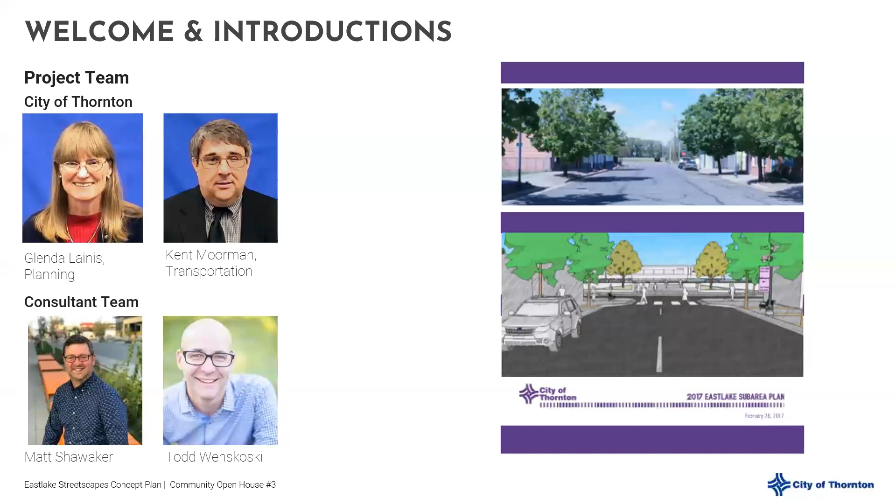The project we are presenting today is a next step action recommended in the 2017 Eastlake Sub-Area Plan. It's led by the City of Thornton team, including Glenda Lainis from Planning and Kent Moorman from Transportation. The consultant team is led by Livable City Studio, including Todd Wenskoski and myself, Matt Shawaker.

The agenda for today is clear: a quick welcome, a quick overview of the project schedule and where we're at, a review of the preferred alternatives, as well as wayfinding and signage, and then questions and discussions and next steps.

For this meeting, the questions and discussions that were held at the original live meeting on July 25th are summarized and available on the City of Thornton website.

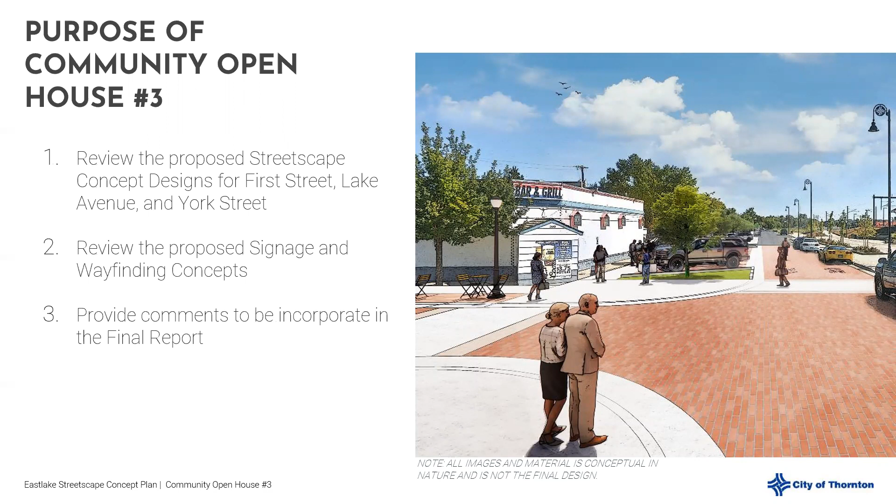The purpose of this meeting is to review the proposed streetscape concept design for First Street, Lake Avenue, and York Street, as well as the signage and wayfinding concepts. Your comments that you can make through the website will be incorporated into the final report and influence the final conceptual designs, phasing, and implementation.

A brief overview of the project for those who have not seen this previously. The goal of this project is to develop streetscape conceptual plans for Lake Avenue, the east side of First Street, and York Street from 124th Avenue to Birch Street.

These plans will be conceptual level, and costs will be prepared to inform future implementation projects. I want to be clear, no funding has been set aside for the implementation of these projects as of yet.

Conceptual level plan components will include cross sections describing ADA compliant sidewalks, traffic lanes, and bike lanes, as well as parking configuration. In addition, they include landscaping and identification of opportunities for placemaking, amenities, and public art. Lastly, the next step will be implementation tools and strategies to construct or phase the construction of the streets.

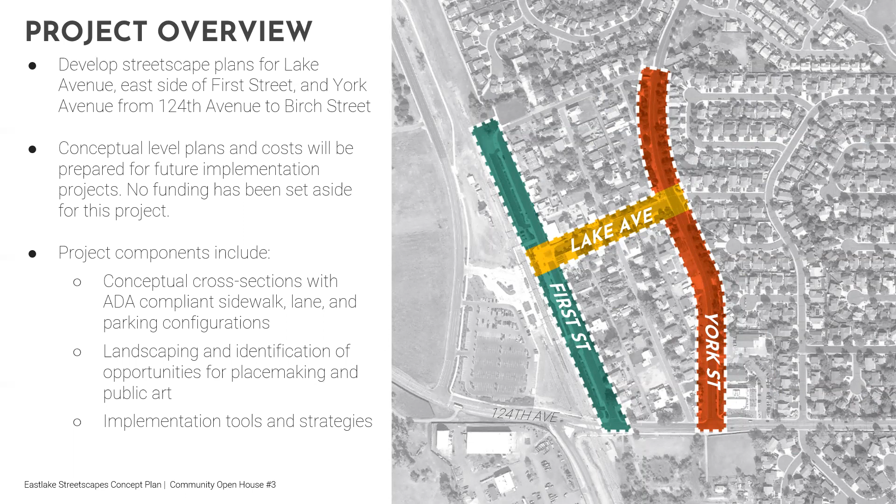Through that process and the existing conditions analysis, we identified the potential role of each street in the neighborhood. First Street, in green, really becomes the front door to the neighborhood, primarily from 124th Avenue, as well as the light rail station.

Its functions are business access and function to accommodate the businesses along the east side, comfortable pedestrian and bike connections to Lake Avenue, trails to the north and south, and of course the N-line station, and then identity and gateway into the Eastlake neighborhood, given its first impressions and front door.

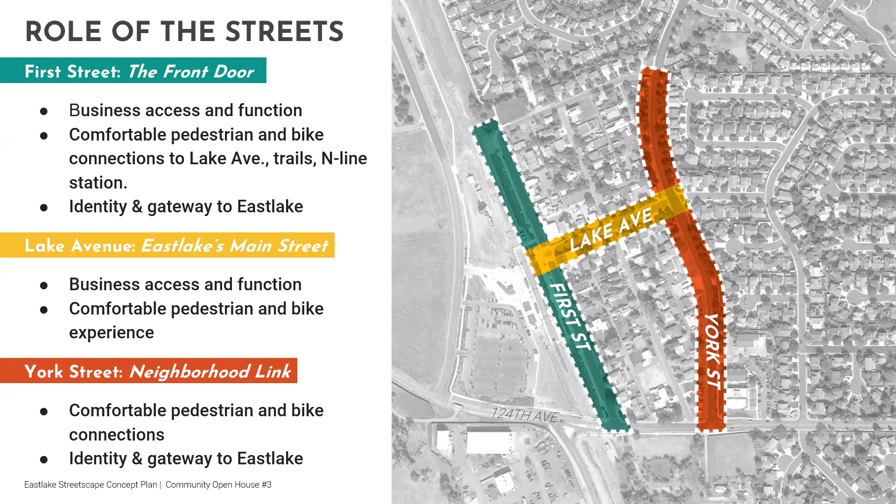We thought a quick review of the existing conditions and opportunities would be valuable before reviewing the alternatives. For First and York Street, the primary conclusion from the existing conditions analysis is that the roadways are too wide. This encourages speeding and limits space and comfortable use for pedestrians or bike users.

The key opportunity for these two streets is to narrow the lanes, which will slow traffic and then create space for pedestrian and bikes, as well as other amenities, including landscape.

On Lake Avenue, the street isn't overly wide. There is limited opportunity to narrow it, but the key opportunities there are to accommodate pedestrians and bikes and resolve some of the grading challenges that create access challenges.

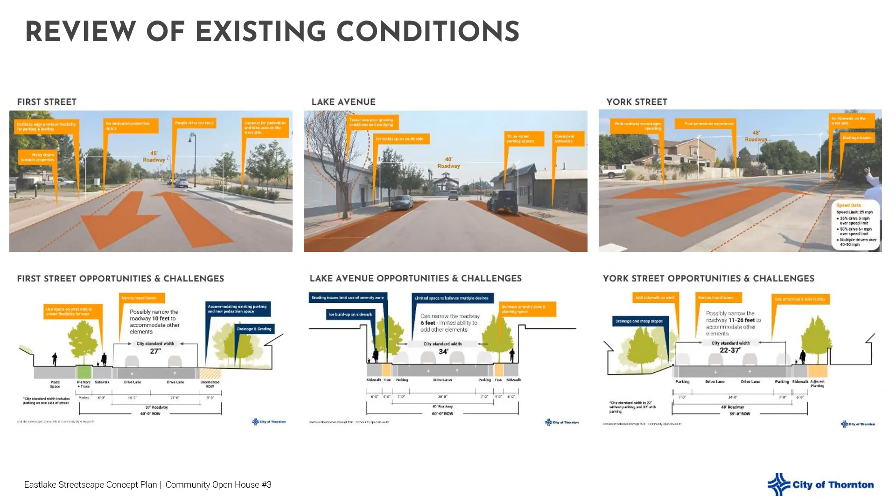Previously, in community meeting number 2, we reviewed two alternatives for each street and then gathered community feedback through discussion in the meeting, live surveys, and subsequent online surveys. Our goal for today in this next part is to review these alternatives, the survey results, and then the development of the preferred alternative for each street.

So we'll start with First Street.

Two alternatives were presented for First Street. Alternative 1 was a complete street, meaning it includes safe, comfortable elements for each type of user: pedestrians, bicyclists, vehicles, and of course parking, as well as amenity spaces for them.

In alternative 1, on the left in light blue are painted bike lanes, in the center two 10-foot traffic lanes, and in darker blue, ADA accessible sidewalks, with green representing landscape and space for amenities and street trees. On the right side, some parallel parking is provided on the east side.

Alternative 2, called Flexible East Side, emphasizes accommodating the function and access for existing businesses on the east side of First Street. The roadway space is shifted as far west as possible and made as narrow as possible to create additional space on the east side for a new sidewalk, green amenity zones, street tree areas, and parallel or angled parking similar to the existing layout of the street.

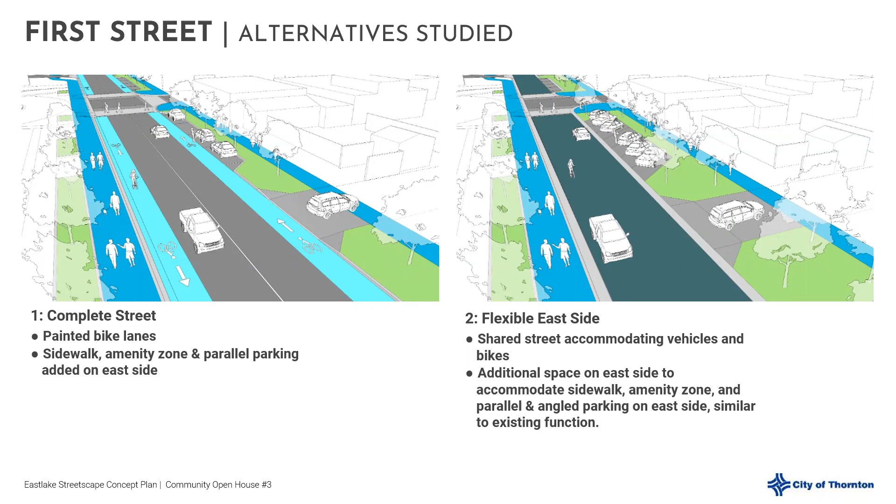The second question: of the two alternatives presented for First Street, do you have a preference? The survey showed a preference for alternative 2.

Based on that, and additional review with the city of Thornton and other stakeholders, alternative 2 was selected as the preferred alternative. Key features include the travel lanes shifted to the west curb to accommodate the organization of parking along the east side, expanded pedestrian and amenity green spaces on the east side, and the shared street shown in blue, reducing the width of the lanes to create space on the east side.

This preferred alternative proposes a shared street — a differently textured and surfaced street than typical, promoting slower travel, narrow, and shared between all users, meaning bikes and cars. The key is keeping the speed slow, which we believe we can do.

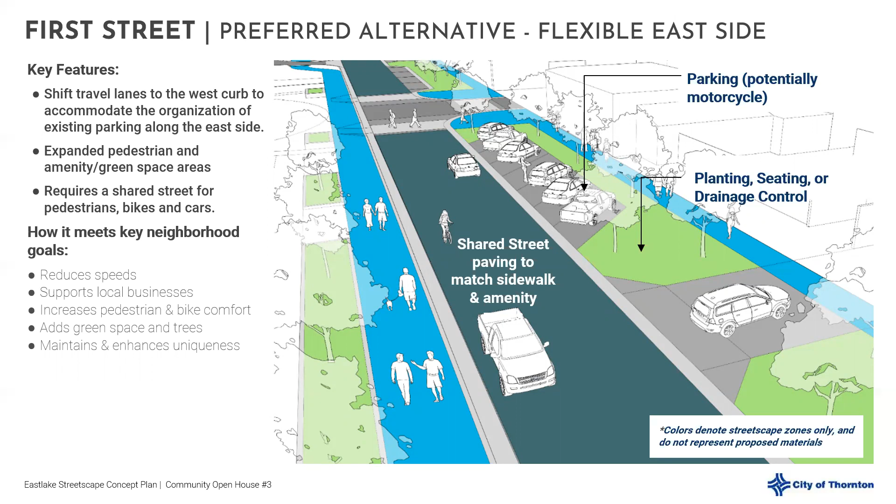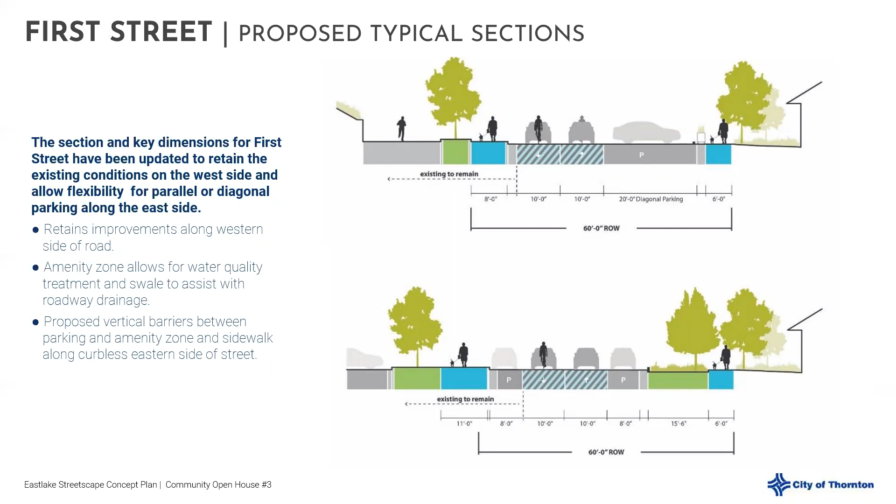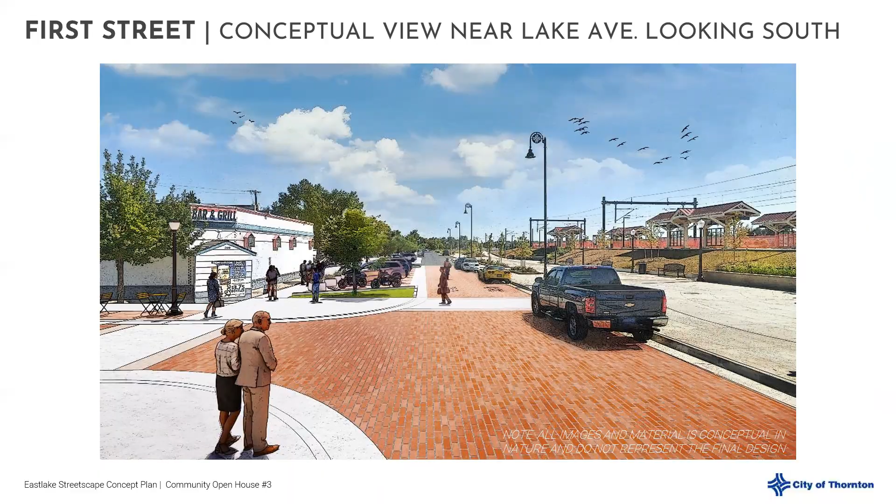Moving on to Lake Avenue now. Again, two alternatives were studied for Lake Avenue. The key existing condition and challenge on Lake Avenue is grading.

For those who have been out there or seen previous presentations, we know there are multiple areas along Lake Avenue between First Street all the way down to York Street where the front doors of buildings are up to 1.5 or even 2 feet higher than the roadway itself, which creates access challenges that need to be resolved in a new concept.

So how we resolve that concept and also balance the competing needs for parking, businesses, pedestrian spaces, amenity spaces, as well as bike circulation become the challenge on the street.

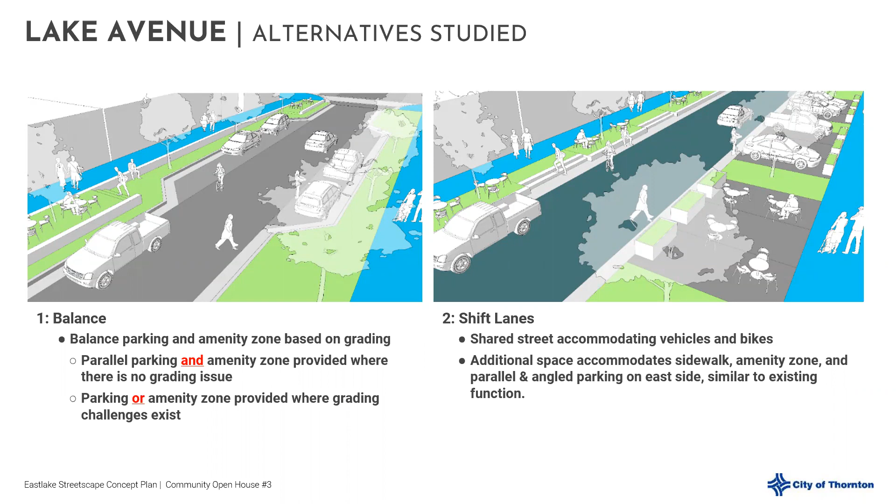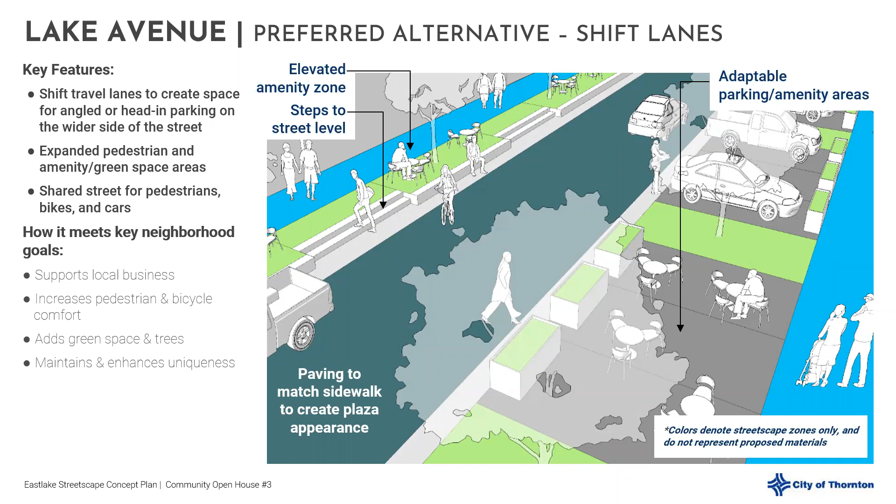The other key feature here is a narrow shared street for pedestrians, bikes, and cars. We believe this alternative meets those key neighborhood goals, supports local businesses, increases pedestrian and bike comfort, and adds green spaces and trees, really creating a unique space and street within the neighborhood.

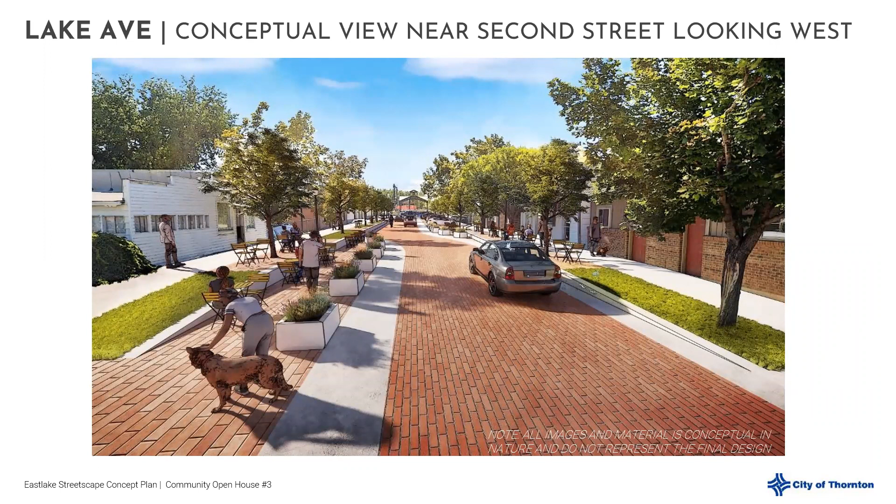You can see a key feature about in the middle of the image where the roadway curve slightly shifts to the left. That is a key design feature that allows us to locate the head-in parking in the distance where the grading best accommodates and where the adjacent uses best require it, but also will serve to additionally slow down vehicles because they have to navigate that slight curve.

And last but not least, York Street. Again, 2 alternatives were studied for York Street. The first one we called bike lanes, and before I get into it, I'll identify several common features to both, and then we can discuss the 2 things that are different in each alternative.

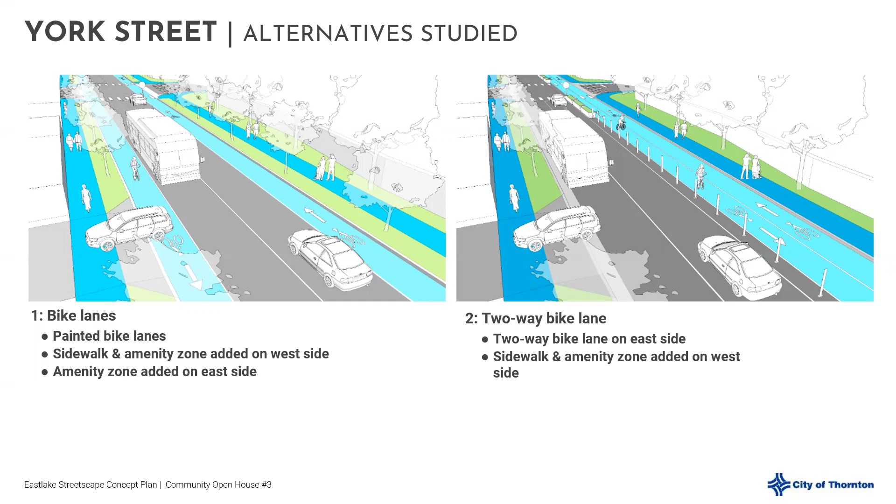So based on this feedback and discussion internally with the city and stakeholders, alternative 2 was selected as the preferred alternative. This is for a couple key reasons. One, alternative 2, by locating the two-way bike lane on the east side of the roadway, we reduced the driveway conflicts and increases the comfort and safety for the bikers.

On the east side, there are, I believe, 3 intersections between 124th Avenue and 128th Avenue. On the west side, there are those same 3 intersections, as well as several driveways. So locating the bike lanes on the east greatly reduces those conflicts and increases the comfort. It also allows that bike lane to seamlessly connect to multi-use trails to the north that lead to Eastlake Lake Park and other open spaces in the community.

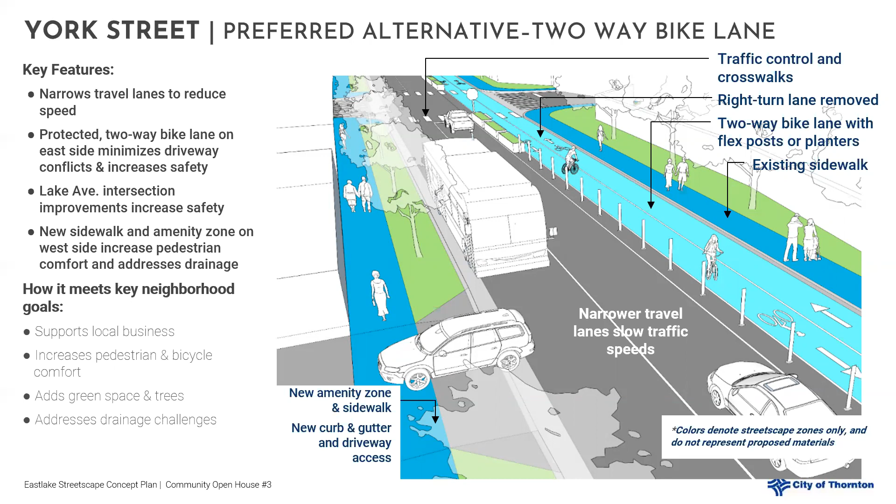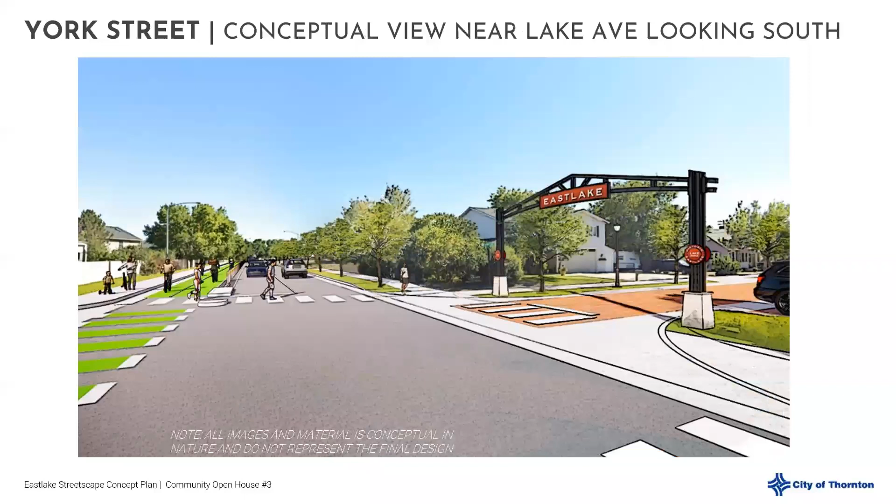Again, you can see in the green on the left side, the two-way bike lane with the posts and the curb protecting it. 2 travel lanes on the right side there, and then to the far right of the street, a new sidewalk and new green spaces with trees. You also see here at the intersection with Lake Avenue, a new gateway feature proposed at the intersection with Lake as you enter Lake Avenue, moving into the main street of Eastlake.

So the 2017 sub-area plan included a parking study that estimated the long-term need for parking in the neighborhood at 400 parking spaces. The existing streets, as you can see here tallied on the left, 1st Street, Lake Avenue, York Street, and 124th Avenue, total 126 on-street parking spaces. Some of those are estimated for, as in York Street, the sub-area plan parking study estimated 60 to 85 spaces on York.

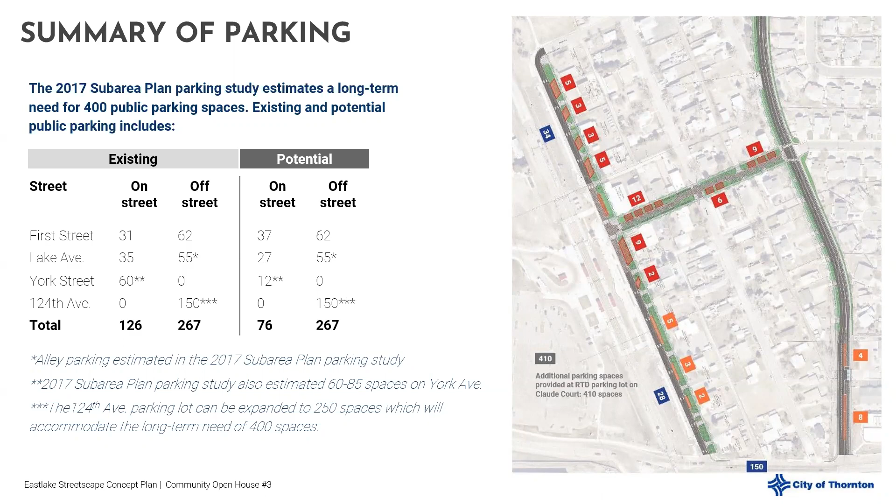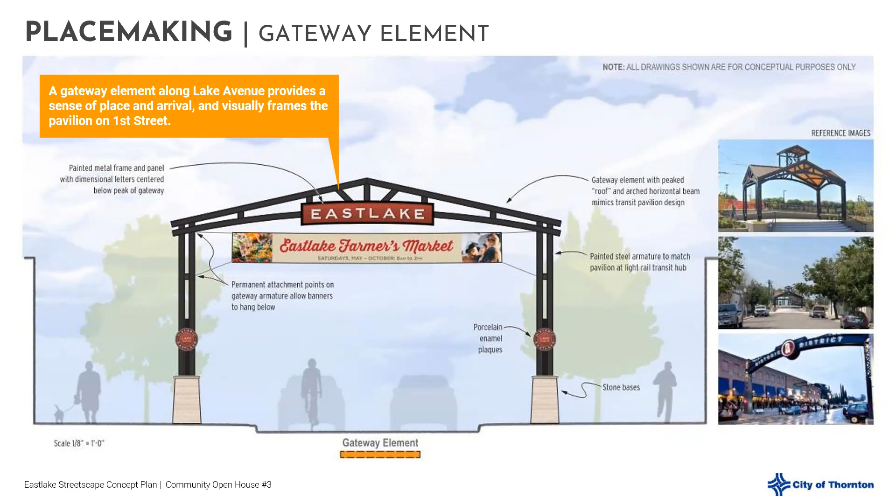As I said before, questions and discussion. There was lively discussion during the public meeting on July 25th, and that discussion is summarized and downloadable on the City of Thornton's website.

The next steps for the project will include further development of the preferred alternatives and concept design, as well as prioritizing each street and elements of the street for implementation and phasing. The city does not expect to build all of these streets at one time; they will be built possibly in conjunction with private development, but also public grants, and implemented in a phased manner. The city and project team will work through those challenges and questions, including that in the final report to be delivered in August or September for review.

With that, thank you for your time and interest in the project and for viewing this presentation. Please find the area on the website where you can add comments, and those will be incorporated into the final concept design, the implementation and phasing, and of course the final report. Thank you again.